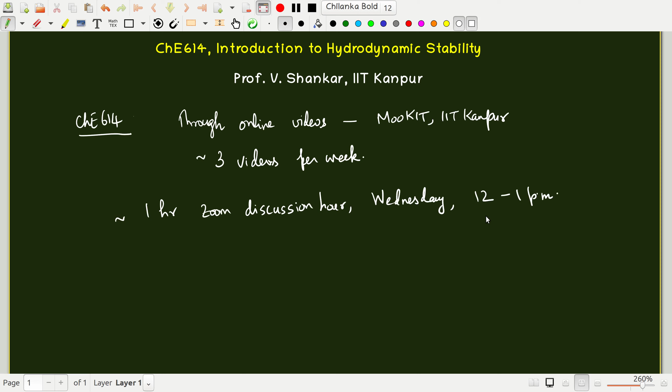And there will also be an approximately 1 hour Zoom discussion hour every Wednesday, and this will be from 12 to 1 p.m. each Wednesday. The announcements for the course will be made through the announcements tab of the course portal. So you should keep watching.

The same announcements will also be sent to the course alias CHE614A@iitk.ac.in. Okay, so all the registered students are part of this mailing list, including the instructor, that is myself, and so we will be able to correspond to each other through this. Now, there is another unofficial email ID for the course, that is che614a.iitk@gmail.com. Now, this is the course alias that I will send emails to you.

Okay. This is the informal email address wherein you will send emails to me. Now, this can be regarding some issues with respect to uploading of assignments or exam solutions through the online portal. So you will use this email address in case you are not able to upload or there are some issues with net connectivity and so on. Right. So this is the email address wherein you should submit anything that is related to the course. You should not send it to my personal email address. You should send it only to this, and we will keep checking this, and then we will provide you any feedback or address your queries.

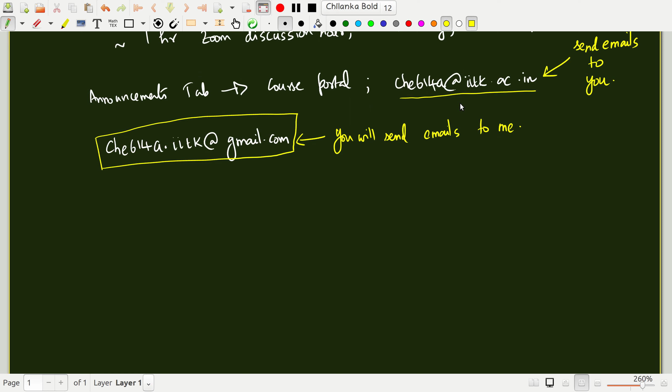Okay. Now, this is the email address that is officially created by the institute. So this is used to send any announcements regarding the course. So that is automatically synced with the MooKIT portal. So you will be able to receive whatever announcement that I post. I will be able to send an email through the course alias as well.

Okay, and so the first course handout has already been posted in the portal. Please take a look at the PDF that has been posted in the portal. Please take a look at that in detail regarding the course objectives, the grading policy, and other administrative details regarding the course. So this is something that I won't repeat here in the interest of time.

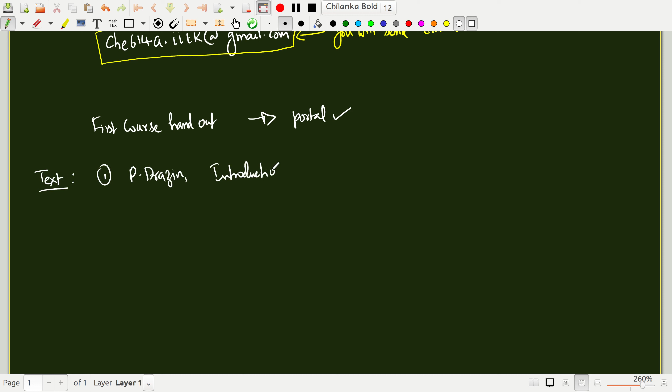Now, there is one thing that I would like to stress on though, which is the course textbook. I will follow two introductory textbooks. One is by Philip Drazin, and the title of the book is Introduction to Hydrodynamic Stability. The other book is by Francois Charru. This is called Hydrodynamic Instabilities. I will of course not strictly follow these textbooks, although most of the topics I'm going to cover are present here. I will of course use explanations from a variety of sources and from my own experience.

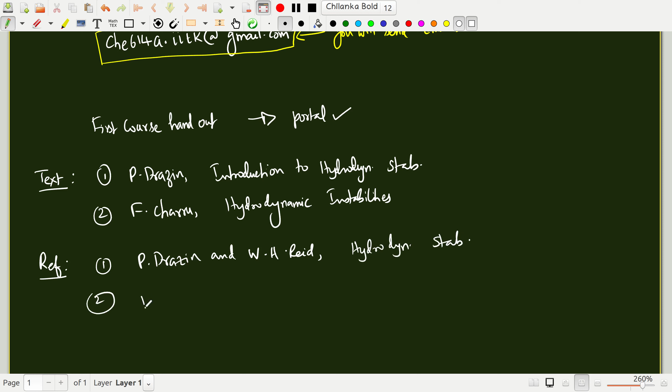Here are some reference textbooks which are at a slightly advanced level. The first is by the same Drazin and Reid. This is a classic in this area of hydrodynamic stability. This is simply called Hydrodynamic Stability. And the second book is by Peter Schmid and Dan Henningson. This is called Stability and Transition in Shear Flows.

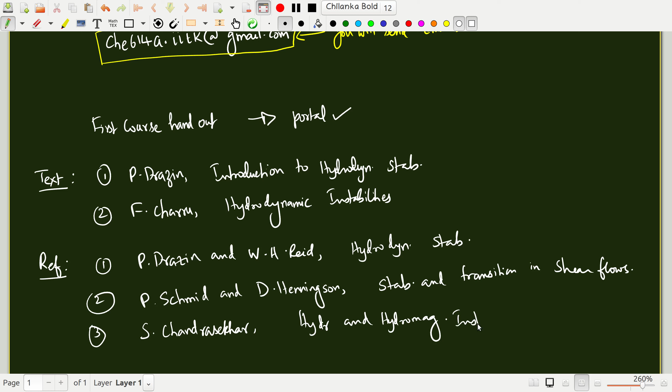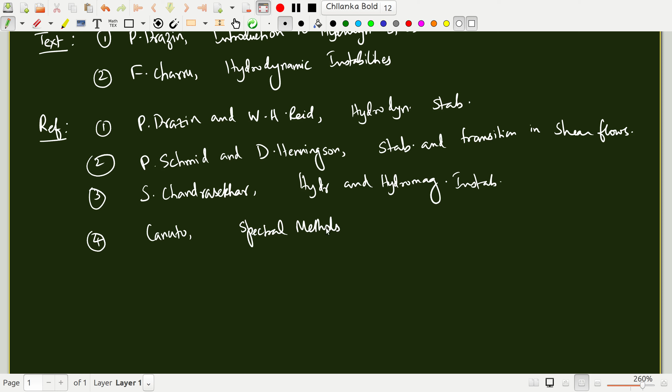Okay. The third is a very old classic by Subrahmanyan Chandrasekhar. This is called Hydrodynamic and Hydromagnetic Stability. And the fourth is a textbook that contains numerical methods. This is called Spectral Methods. Okay, now having said that, we will primarily follow the first two textbooks. The reference books are just for those who want to delve deeper into the subject.

Alright, so now in this module, what I'm going to do is to give you a brief introduction to the subject itself. The subject of hydrodynamic stability is a sub-branch of the broader subject of fluid mechanics or fluid dynamics, and the subject of hydrodynamic stability is concerned with two drastically different flow states. Okay, what are these two different flow states that we are interested in?

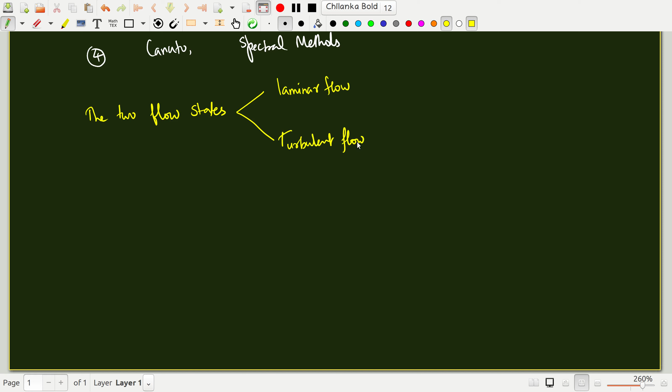One is of course called the laminar flow, which you may be familiar with from your earlier undergraduate courses. The other is called the turbulent flow. Okay, now the subject of hydrodynamic stability talks about the transition between these two flow states. How does this transition happen?

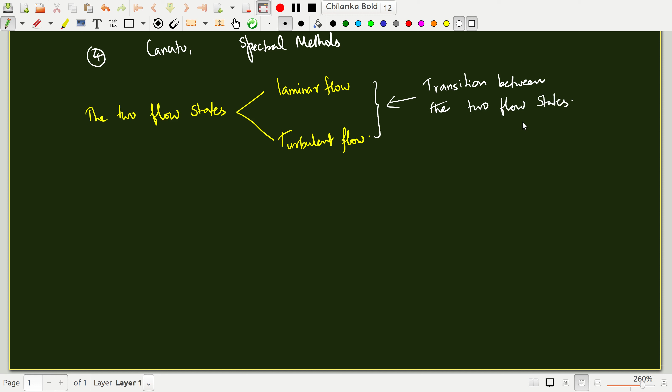Okay, that is one of the main motivations of hydrodynamic stability. Just to refresh your memory, laminar flows are flows that are typically observed at slow speeds or slow flow velocities, and they are typically relatively simple in their kinematics, in that the flow field is not very complex. I'll give you some examples as we go along.

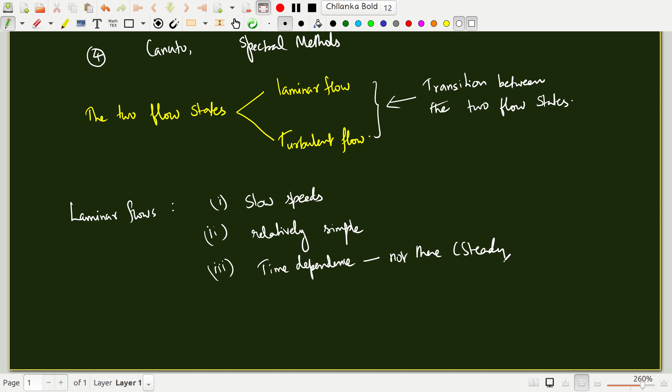And again, the time dependence of the flow is not there. That is, the flow can be steady, or the flow can be unsteady, but the time dependence is not very complicated. Okay, so these are the characteristic features of laminar flow.

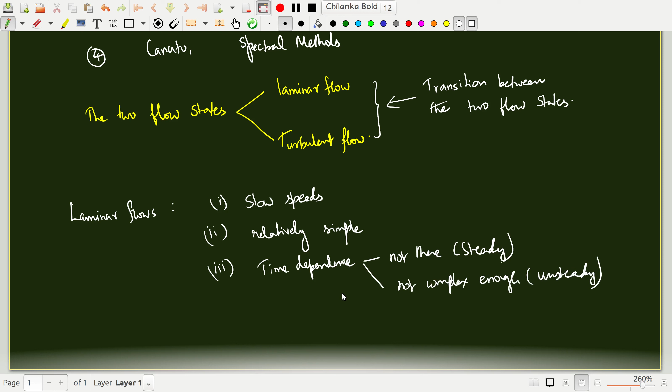Now let me show some examples of laminar flows that you must have seen in your earlier courses. So for example, if you take two parallel plates and then move the top plate relative to the bottom, then you get a linear velocity profile like this, and this is called the plane Couette flow.

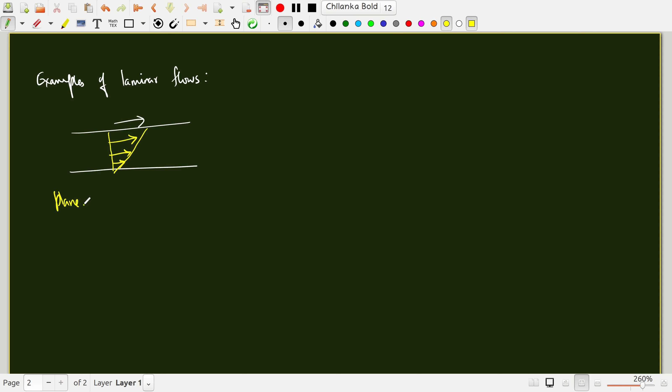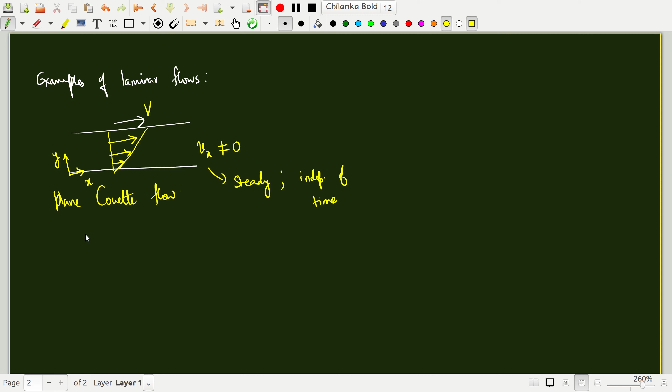Now in this profile, I am plotting the velocity as a function of the vertical distance. This is x, this is y. There is only x velocity that is non-zero, and it is steady in the sense that it is independent of time at a given position, right? And the top plate is, let's say, moving with a velocity V. This plane Couette flow is an example of a laminar flow.

You have what is called flow in a pipe. Let me draw a circular pipe of circular cross section. Now here one has a parabolic velocity profile. This is called the pipe Poiseuille flow, or sometimes referred to as the Hagen-Poiseuille flow.

Here, because it's a cylindrical pipe, one has to use a cylindrical coordinate system. This is the axis z, this is the radial coordinate r, and theta is going around like this. So here the only non-zero velocity is Vz, and of course it is steady. This is another example of laminar flow that you might have seen.

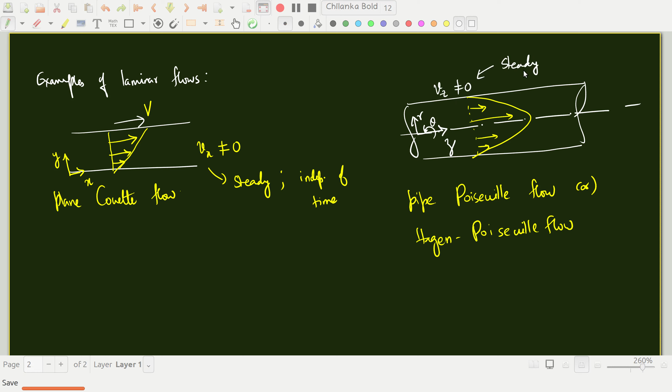Now the same Poiseuille flow can also happen in a rectangular slot. Instead of a circular pipe, you can have a rectangular channel like this, and there is flow in this direction. This is the x direction, let's call this the y direction, and into the slide is the z direction. Now if w is large compared to h, then the flow becomes effectively two-dimensional, in the sense that the two side walls are so far apart that you can treat the flow as just two-dimensional in the x-y plane.

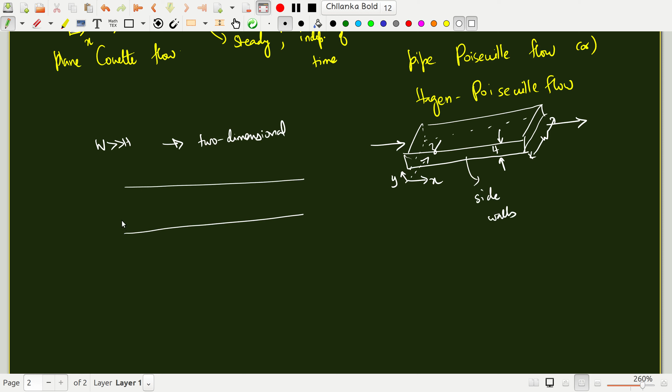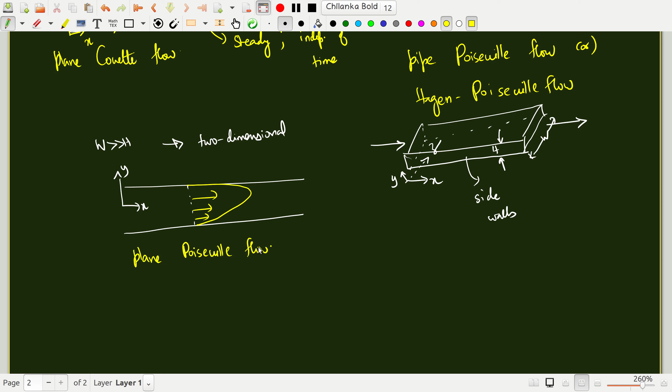So here is x, here is y. Again you have a parabolic Poiseuille velocity profile. Sorry about this caricature, let me draw it properly. This is supposed to be a parabola. This is called the plane Poiseuille flow. This is again an example of a laminar flow.

Another example of a laminar flow is a flow between two concentric circular cylinders, with one of the cylinders moving with some angular velocity omega. If you look at it from the top, the streamlines in the simplest flow will be purely in the azimuthal direction. This is called the Taylor-Couette flow. There are many other examples, but I'm just telling you a little about laminar flows you might have seen in your earlier courses.

Now before I go to turbulent flows, in any of these geometries, suppose I pick a point in space and ask, what is the velocity as a function of time? This is called the Eulerian velocity, because you're fixing the spatial location and measuring the velocity as a function of time. You'll find that the velocity remains constant if the flow is steady. This is steady flow.

Instead of steady flow, suppose you start the flow from rest. This is called the startup flow: you suddenly start one of the boundaries, or suddenly switch on the pressure gradient. The flow is unsteady by definition. At a fixed location in space, the velocity will initially increase and eventually approach the constant value. So even though this is time dependent, the time dependence is relatively simple, so the flow is laminar. Laminar flows are characterized by relatively simple time dependence, like the one I showed.

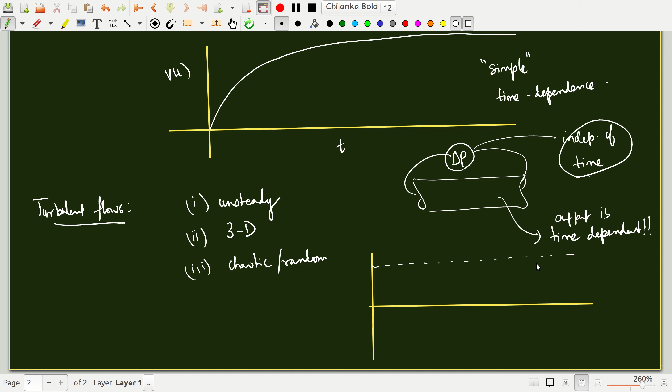If I plot the output as a function of time, and let me just explain what this symbol is. Suppose I plot the output as a function of time, what I'll get is something like this. Suppose this is the velocity as a function of time, time in the x-axis. So there is an average velocity or the mean velocity which is in the flow direction, let's say, but about that non-zero average there are a lot of fluctuations, very significant fluctuations, which are chaotic in the following sense.

If I were to repeat the experiment and measure the velocity at a given point, the answer I'll get will be completely different from the earlier experiment. So that is what I mean by random fluctuations. So the turbulent velocity field is highly fluctuating in the sense that if you repeat the experiment, there is no guarantee that you will get the same signal. You will indeed get a completely different signal.

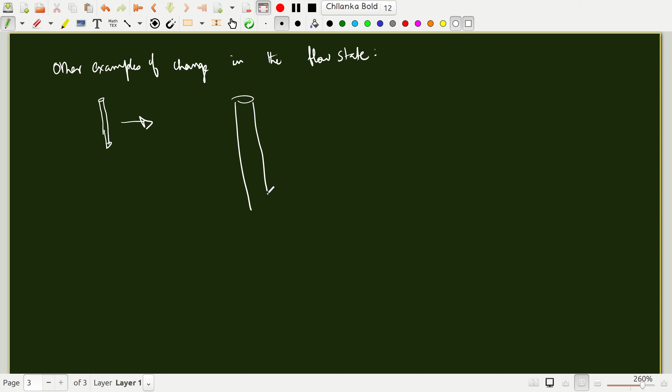Now, this is not the only example of a flow transition, although this is one of the most important examples of flow transitions. There are other examples of a change in the flow state. For example, if you have opened a tap in your kitchen or bathroom, and if you open the tap very gently so that you are not opening it fully, you just open a little bit, you will find that from the outlet of the tap a thin liquid thread comes down. I'm going to exaggerate this for the sake of illustration. So this is an example of a cylindrical liquid jet.

Of course, the jet is flowing continuously, water is coming out of the tap. Now, if you look at it carefully, what you will observe is that eventually the shape of the cylindrical jet will become different, and this will break down into drops of water. Breakup of the jet into drops of water. Now this is called the Rayleigh or capillary instability.

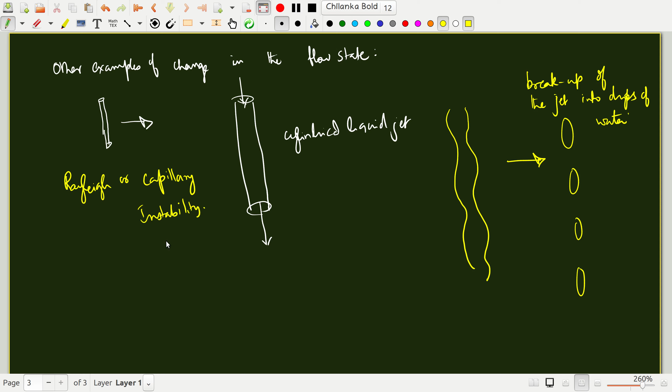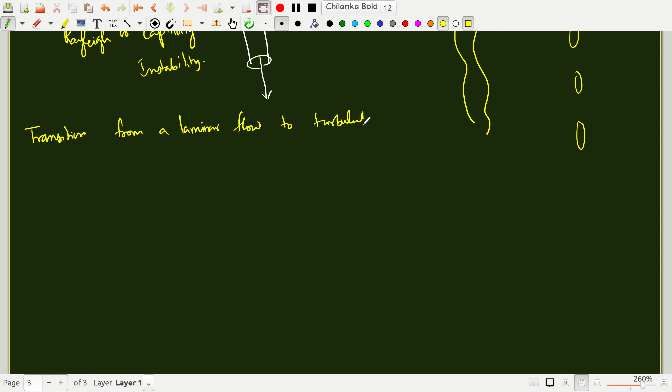So generally through these examples what we observe is that fluid flows, depending on various parameters that are driving the flow, need not remain in a very simple state. Like for example, in the cylindrical jet you have a very nice cylindrical jet, but eventually it breaks up. So fluid flows can often undergo a transition from a laminar flow to a more complex flow which is turbulent, or to a complex flow state like a bunch of droplets arising out of this breakup of this liquid cylindrical jet.

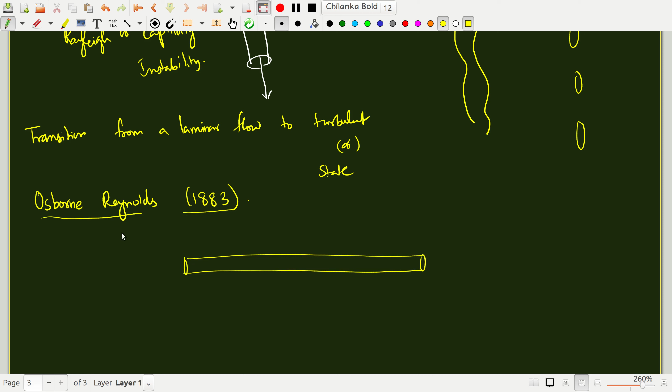Now the subject arguably started with the experiments of Osborne Reynolds in Manchester around the year 1883. He published a series of papers starting in 1883, which reported experiments that he performed of flow of water in a glass tube. This is a cylindrical glass tube. There is a funnel like entrance to minimize the disturbances into the tube. And he also injected a colored dye stream, a colored ink or dye, into the flow.

Now he observed that when the flow is laminar, the dye stream remains parallel. It just comes out like a straight line, assuming that the dye has very low mass diffusivity. So at sufficiently low velocities, the flow is laminar. But beyond a critical threshold velocity, what he found was that the dye initially remains like a straight line, but then eventually it starts undergoing complicated motion.

At still higher velocities, he finds that the dye completely breaks up in the pipe, and the entire liquid of the pipe becomes colored with the dye. The dye is completely mixed up, and the onset of disturbances in the dye's trajectory is an indication of a more complex flow state called the turbulent flow state. Reynolds himself called this turbulent flow state a sinuous flow, as opposed to laminar flows, which he called smooth flows. That's the title of the paper. It involves a transition from smooth flow to sinuous flow in a pipe, a transition between these two flow states.

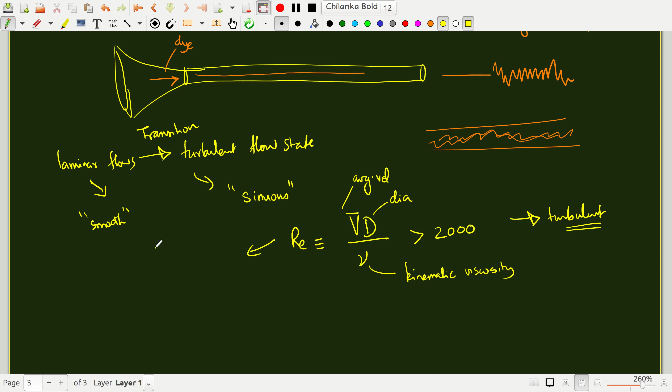When this parameter is greater than around 2000, the flow becomes turbulent. This is the first illustration of the power of dimensional analysis, in the sense that regardless of what diameter you use, what average velocity you use, what density and viscosity of the fluids you use, the transition always happens at this dimensionless group, which we now call the Reynolds number, denoted as Re in honor of Reynolds himself. It's a dimensionless number.

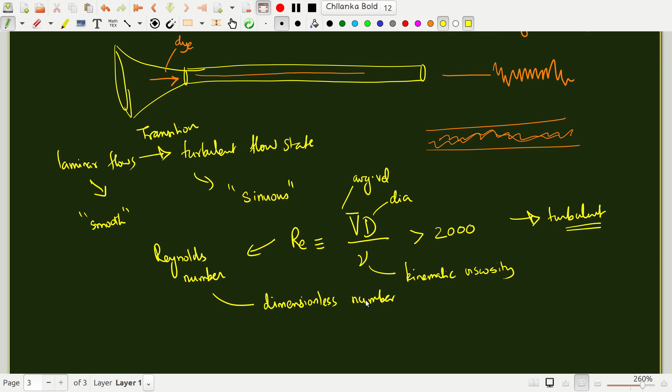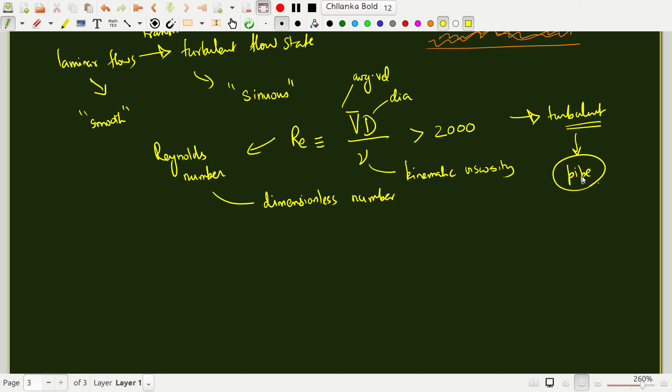You should verify that it is indeed dimensionless. And whenever Re is greater than 2000, the flow undergoes a transition to the turbulent regime in the case of pipe geometry. And this also has macroscopic consequences. When you plot the friction factor as a function of Reynolds number in a log-log plot, in the laminar regime, you know that the friction factor goes as 16/Re or 64/Re, depending on the definition. So essentially it goes as 1/Re.

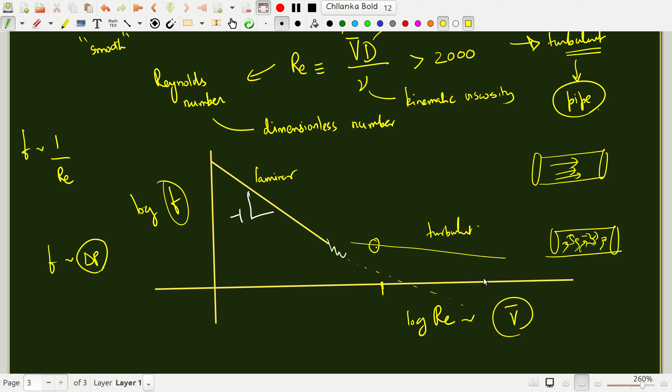So all the work being done on the fluid is not spent in pushing the fluid in the x direction. So to get the same average velocity, you have to spend more energy in turbulent flow. So turbulent flows have larger dissipation in some sense. Another important feature about this transition, called the pipe flow transition, is that the Reynolds number for this transition, Re_T, is typically 2000, but under careful experimental conditions it can be as high as 10 to the 5. This is very important; we'll return to it a little later. So this is what Reynolds found.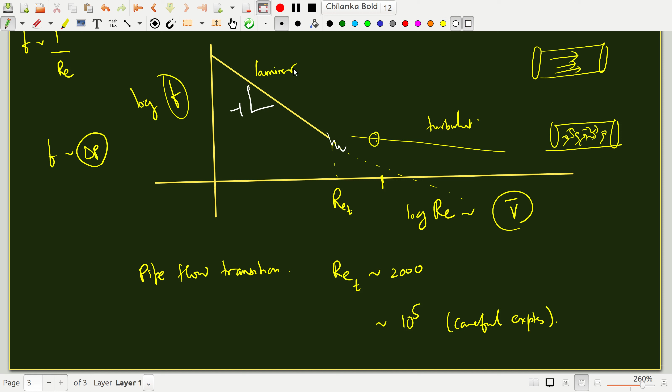Now the subject of hydrodynamic stability, which is the objective of this course, attempts to understand how transition occurs. In the case of Reynolds' experiment, how transition from laminar flow to turbulent flow occurs. And we postulate that the transition occurs due to an instability of the basic laminar flow.

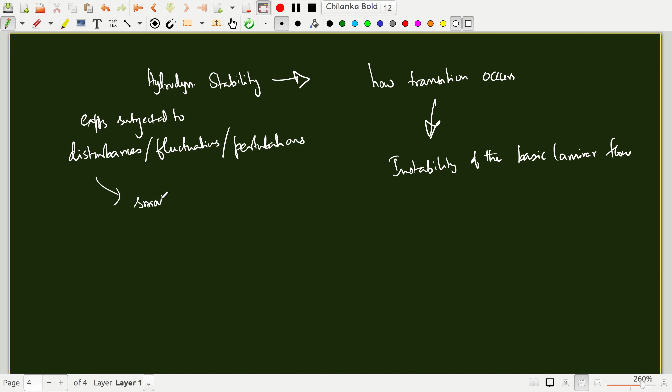In the sense that whenever you have an experiment, the experiment is always subjected to disturbances or fluctuations in the velocity, in the pressure, or perturbations. I'll use these three descriptors interchangeably. Now, some of these fluctuations are extremely small or infinitesimal, so they are unavoidable. So the flow is always subjected to disturbances of various types.

That means that in order for you to observe the laminar flow, the flow should be stable to these external perturbations. So what we attempt to do in hydrodynamic stability is to understand whether a given laminar flow is stable or not to infinitesimal perturbations, which any flow is subjected to in experiment. We do this in a mathematical or computational manner, but that's the basic idea. You can also understand this very briefly by looking at the following scenarios.

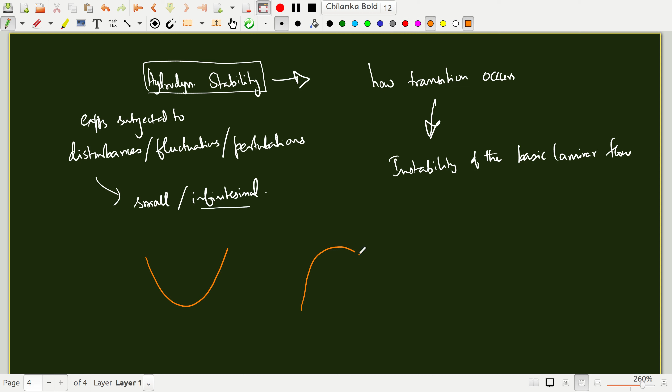Imagine that this is gravity. I have a ball in a valley. If I perturb the ball a little bit, then gravity is going to pull this ball down. This is stable. Now if you carefully perch the ball on top of the hill and perturb it a little bit, it's either going to go this way or that way. So this is unstable. If you're on a flat portion of land, even if you perturb the ball a little bit, it's going to remain there. It's not going to go away, and it's not going to come back. This is called neutrally stable.

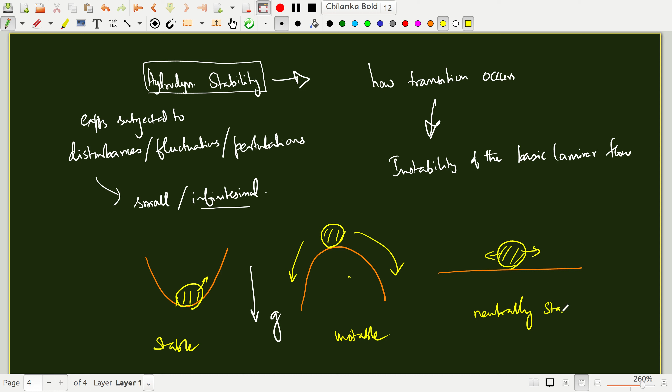So we want to know, by subjecting a flow to small deviations from the laminar state, whether it is going to remain in the laminar state or whether it is going to go away from the laminar state. Then we call it unstable. This is the basic idea of hydrodynamic stability.